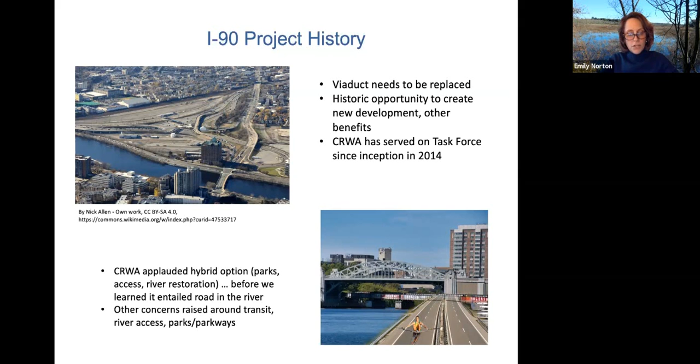And other groups had many other concerns, and Ari is going to cover many of those. So we are not holding this event just for fun or because we have run out of things to do trapped at home. We are doing this because this is your road. These are your parklands, your tax dollars at work, and your river. And you have the power to have an impact.

And in fact, arguably, you already have. MassDOT received approximately 1,600 comments on all aspects of the project, and of those, over 400 were saying that we don't want a road in the river. So we were very pleased to see MassDOT announce, literally just this past Monday—this is a screenshot of their live streamed meeting—that they're going back to the drawing board to look at alternatives that also do not entail putting a road in the river, as well as do more to take into account climate change, climate resilience, and environmental justice.

So what we're looking for tonight is to share with you our vision for what this $1 billion+ project should look like. We'd like to hear your thoughts, and then we encourage you to make your voice heard with your elected leaders because they work for you. And with that, I will turn it over to Pallavi.

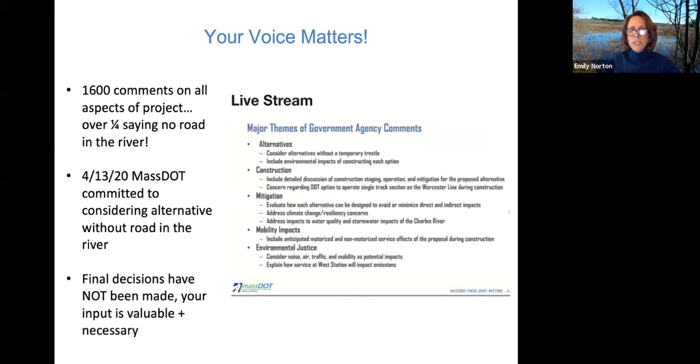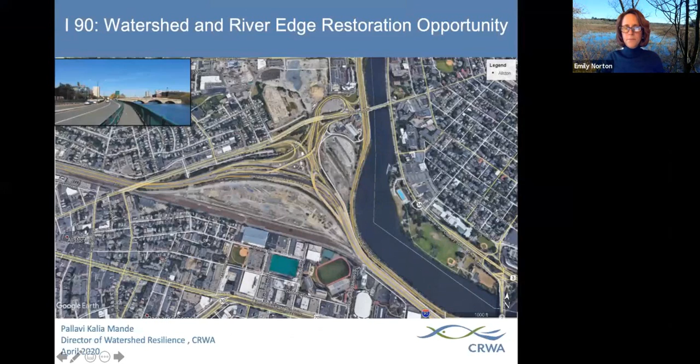Thanks for the great introduction, Emily. So I'm going to quickly give insight into where this project is situated for those of you who don't quite know the bearings. This is, as Emily mentioned, located in Allston. So I just wanted to orient everybody in terms of the location of the project. It's right in Allston, next to the river.

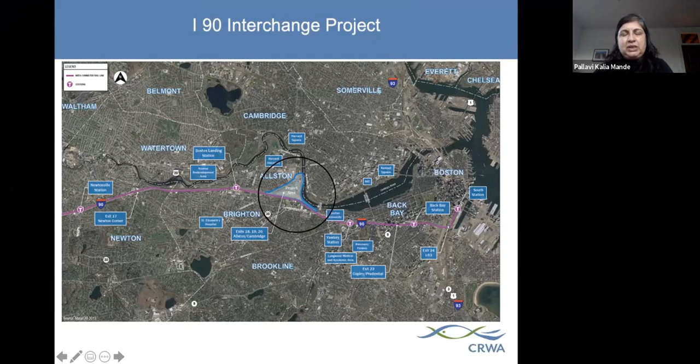The commuter rail section is what Ari is going to be focusing a little bit on, but my presentation is mostly focused on how the project fits into the broader stormwater management and flood resilience context.

This is what you see of the project right in what is famously called the throat area. As you can see, the cross-section here is very constrained. So a lot of the alternatives that have been formulated have been trying to figure out how you can fit the different modes from Storrow Drive, the Pike, the rail corridors, and the pedestrian and bike transit through this narrow section of right-of-way.

What I'm going to be talking mostly about is sharing with you the current DOT proposed layout for the project, including what they are proposing as temporary roadway in the river for the construction duration. We're going to examine the existing stormwater and flood inundation context for the project, and then look at how we see that as an opportunity for sub-watershed level restoration as well as riverbank restoration. And then I end with some discussion and next steps.

So as I mentioned, this is what has been proposed as the layout for the project. What you see highlighted in yellow is all the infrastructure that is at grade. What is highlighted in blue is what's coming on fill. And the section that's highlighted in brick red is what's on some bridge infrastructure. As you can see on the river edge, there's a new park that's being proposed.

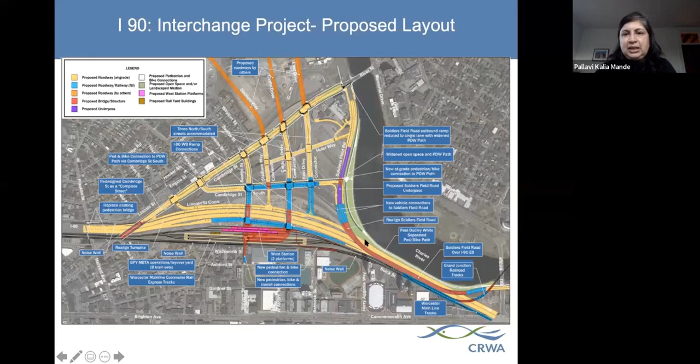And this is the section which is referred to as the throat area, which I'm going to zoom in on. As you can see, this particular option that has been identified as the hybrid option stacks Soldiers Field Road right on top of the eastbound section of the Pike. So it gets us some additional room to accommodate increased parkland and the Paul Dudley White pathway.

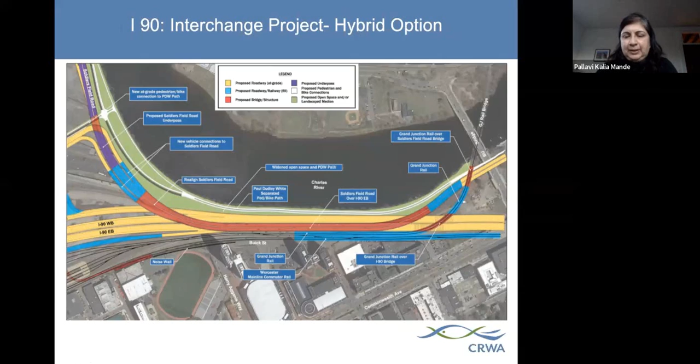This is what the proposed hybrid option looks like in cross-section. As you can see, again, there is Soldiers Field stacked right on top of the eastbound section of the Pike. This is the eastbound, and as you can see, we are able to accommodate the various modes of transportation, including the improved section of the Paul Dudley White pathway within the right-of-way. So this option, as Emily mentioned, we were pretty happy with because it was not impacting the river in any way, and we were able to accommodate all the users in terms of multimodal transit into the existing cross-section.

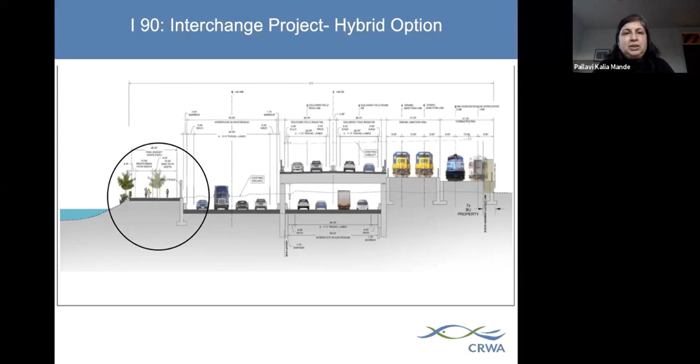However, once the discussion was focused on construction, we found out that there was, in fact, going to be a temporary roadway—relocation of Soldiers Field Road into the river.

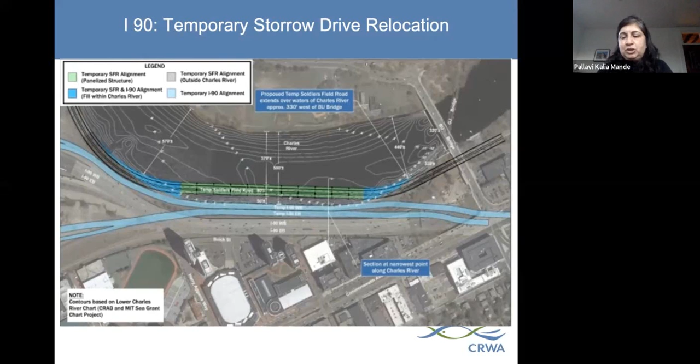There's a cross-section for about 80 feet that has been projected into the river about 50 feet from the existing riverbank, and that has huge consequences in terms of impacts to the river. Not only are we looking at possible sediment disruption from suspended silt, but also other contamination, whether heavy metals or toxic chemicals, into the water column.

We're seeing water quality degradation with increased erosion, fuel and oil spills, as well as excess nutrients and bacteria. And finally, there are obviously impacts to the aquatic habitat in the river. With rising temperatures, we see lowered oxygen levels, increased growth of invasive species, and decreased biodiversity, as well as algal bloom, which has consequences for human health too.

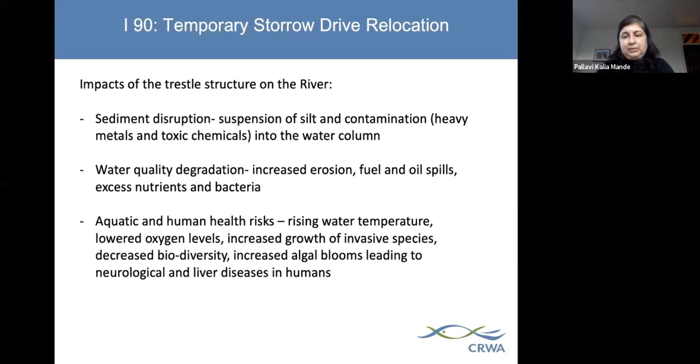So we've been up in arms about this proposal for the last 6 months. We've testified at various meetings of DOT and the FMCB board. And the good news, at least some of it, has been that we saw acknowledgement from DOT on what they've heard in terms of opposition to this proposal, and an actual commitment to seeing alternatives which would not have the temporary trestle structure in the river.

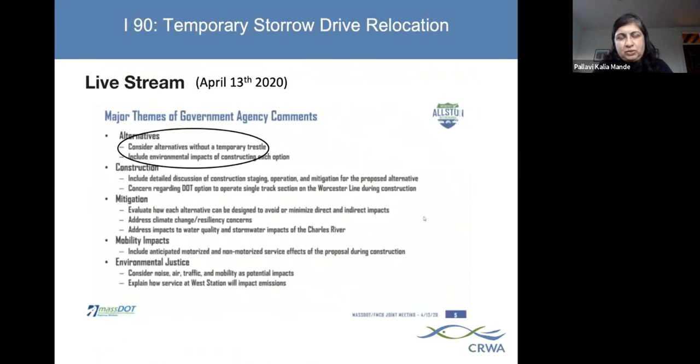This was a live stream presentation from earlier this week on Monday, and we seem to be making some headway on that, so that's good news.

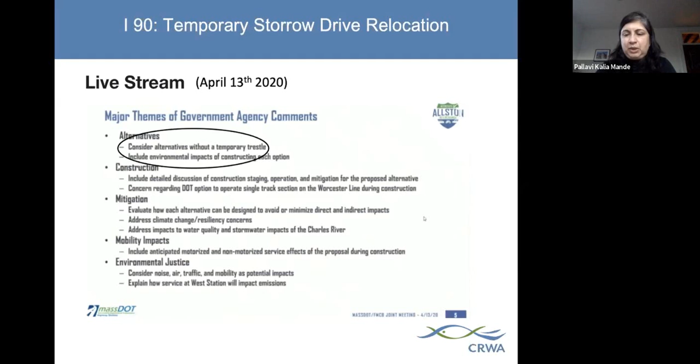What I wanted to share with you now is where the project sits in terms of its urban context. This is the area of North Allston Brighton, and as you can see in gray, there's a large section of impervious cover in this area, everything from roadway to parking lots to just paved areas.

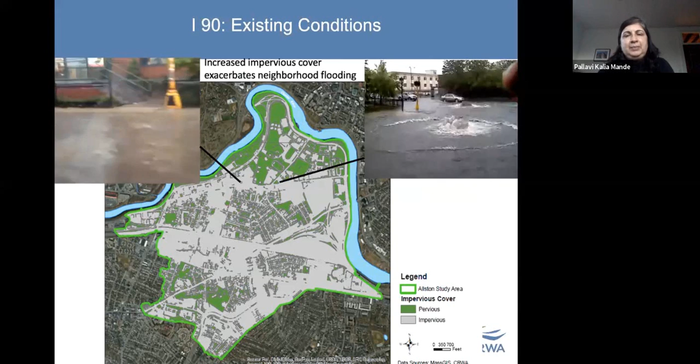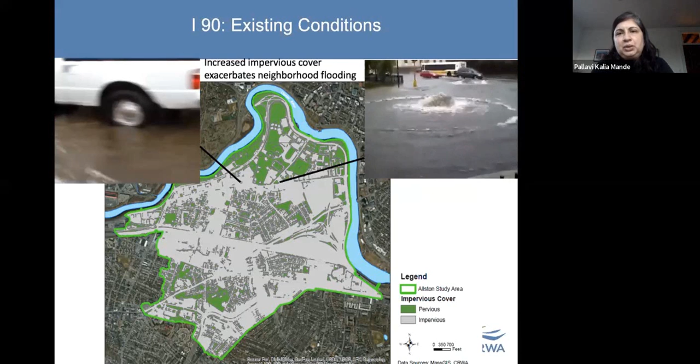And as a result of that, every time we have a big storm, there is a lot of flooding that this area has seen over time, and with climate change, that's only becoming worse. This has also resulted in instances of overflowing manholes and disruption to everyday life, with basements getting flooded. This area has seen, over the course of the last decade, a huge issue with flooding and stormwater management.

And these are all at capacity, so every time there is additional rainfall, there's nowhere for the water to go. So you see the flooding happening in your street right away.

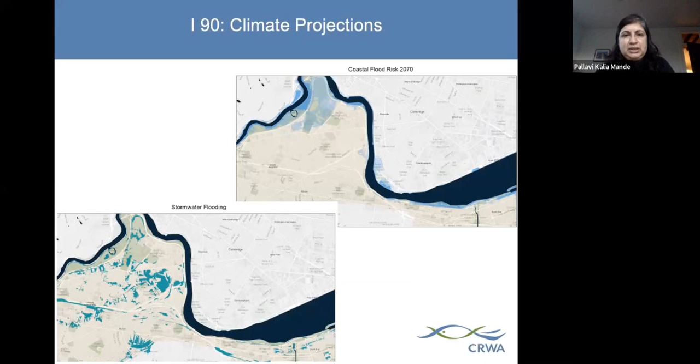With climate projections that have been modeled, we are seeing not only impacts with coastal flood risk, which takes into account the Charles River Dam still being in place, but as you can notice, the stormwater flooding is way more intense. When you combine the two, you can see that a large part of this area is going to be inundated by 2070 by water that could be around 10 feet.

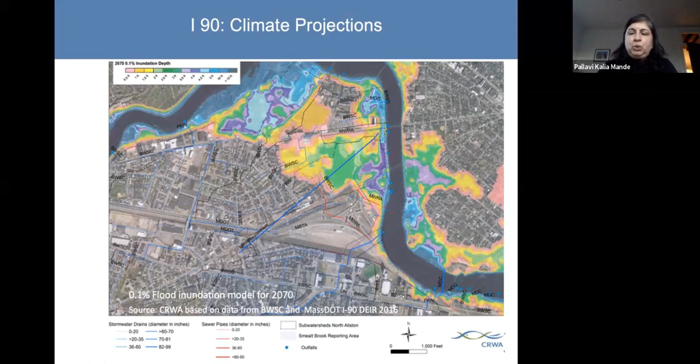So seeing these projections into the future, we are really looking for every chance we get to retrofit this project with what is known as green infrastructure. And I'll talk about how that could also be a positive for all the heat impacts that this area is seeing as part of the climate projections.

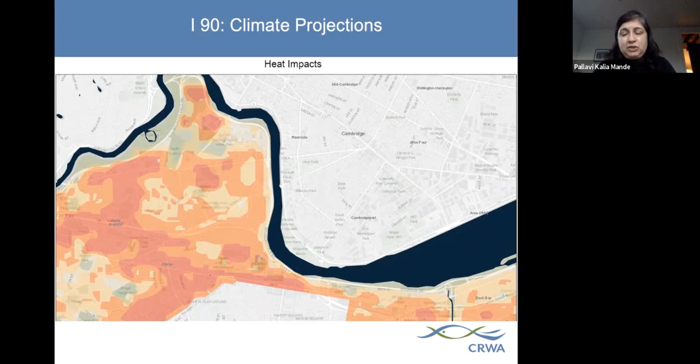So not only are we looking at, during wet weather, huge flood impacts, but during the summer months, the number of hot days above 95 degrees has gone up by many-fold in the last decade.

So where I mentioned green infrastructure, we are looking at soil and plant-based strategies to retrofit this impervious cover with strategies that would replicate the natural hydrology of an area. The idea is to replicate decreased runoff and increased infiltration, since converting a natural forested landscape to an urbanized one creates a huge difference in runoff and infiltration. So we are trying to retrofit these urban areas with green infrastructure to replicate those numbers.

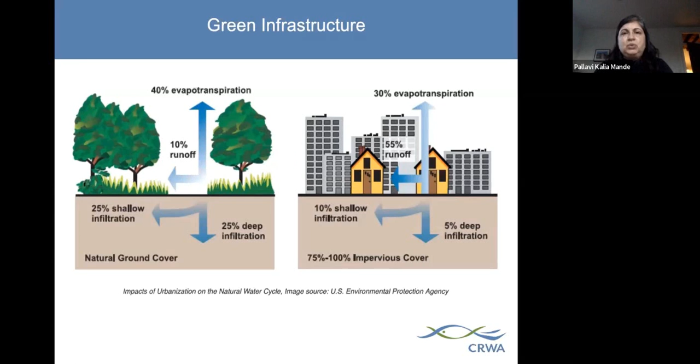As a result, we've sized different kinds of strategies in the different watersheds, such as bioswales, constructed wetlands, and inundated parkways, to be able to combat the urban heat island effect while also providing flooding storage capacity and water quality improvements.

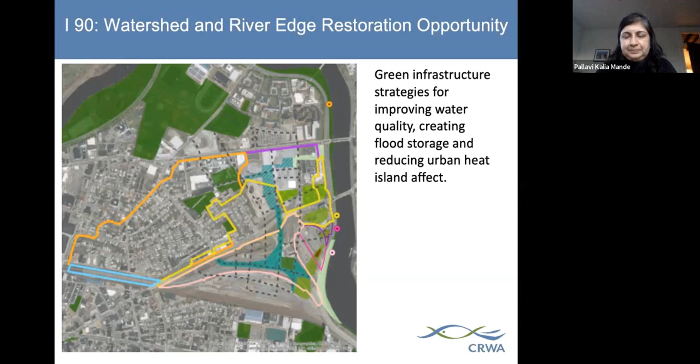These are pictures looking at the underground culverts that I mentioned to you. They're spewing polluted stormwater generated on roadways and paved areas into the river. We see this project as an opportunity to not only address erosion along the riverbank, but also implement strategies that would treat runoff coming through these pipe culvert areas into the river.

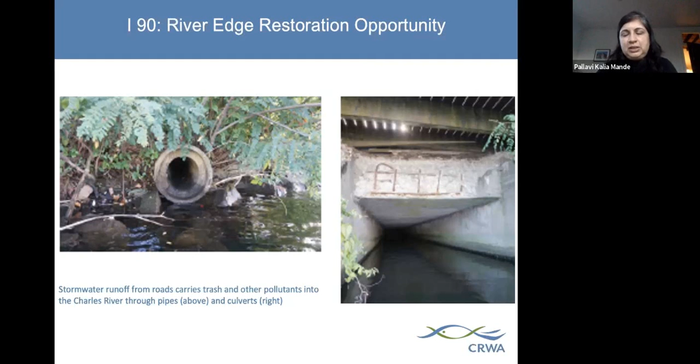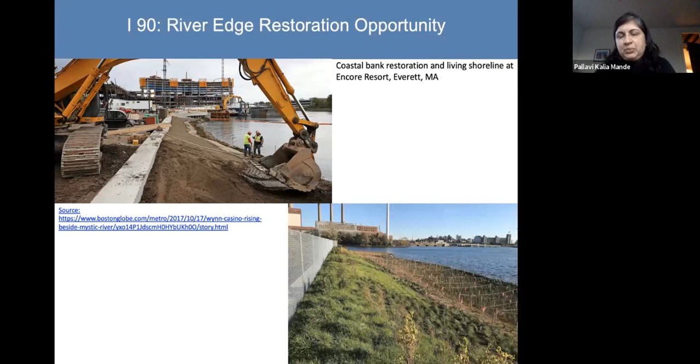These are examples of other cases where riverbank restoration has been done. This particular one is from Everett with the Wynn Casino, where they've installed a living shoreline as well as coastal bank restoration. It's been very successful in terms of both water quality improvements and bringing back a lot of local flora and fauna.

Again, some sections showing how the wetland has been restored, as well as the marsh that existed in this area, has been increased, given that this is still a tidal river. So there's a whole swath of salt marsh restoration that was undertaken at this project, which has been very successful.

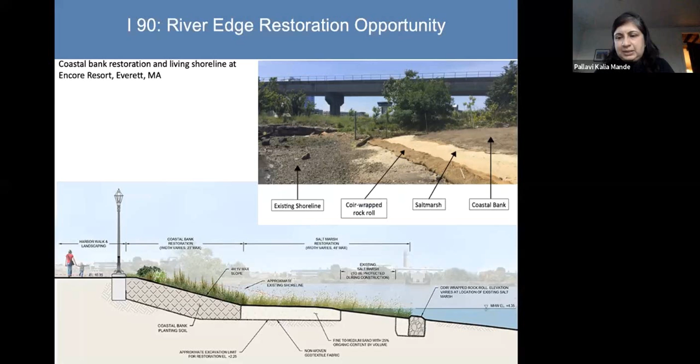Coming back to what we can expect to see in terms of next steps on the I-90 project, we are looking to hear about the scoping summary this summer. The project will go through a notice of project change as part of the MEPA process, also in summer 2020. The next couple of stages will involve submission of the DEIS to NEPA as well as the FEIS to NEPA. So both the MEPA and NEPA processes are running in tandem.

From our end, we see further coordination with the various stakeholders involved with this project, taking this to everybody who should be invested in this section of the river and the future it holds. We'll be reviewing Mass DOT's response to comments that Emily mentioned. There's been about 1,600 comments that DOT received, and they are currently in the process of responding to those, and they will issue those in the summer.

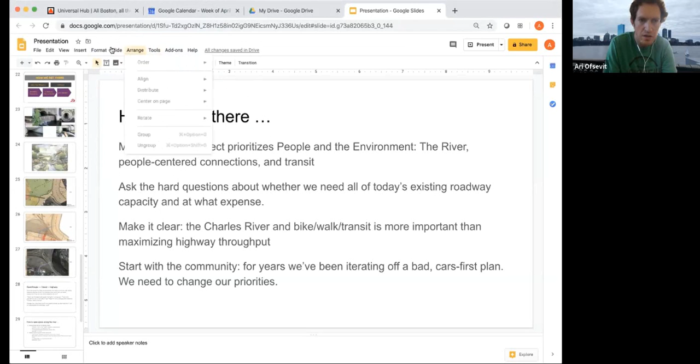All right, can people see the screen? Yes. All right, I can't see it. That's the only problem. Hold on a sec. Well, let's see. Okay, view. Just go to the top here. I gave the ending away there. Sorry about that. View, present. Okay.

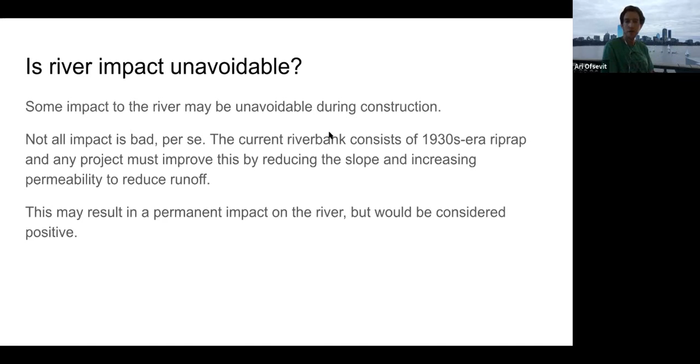The big question, I think, is what is the least impact we can have during the project and wind up with the best possible outcome in the long run? And can we balance all of the competing interests? Well, not actually competing interests, a lot of these dovetail with each other: green space, riverbank access, transit, reduce pollution, reduce traffic.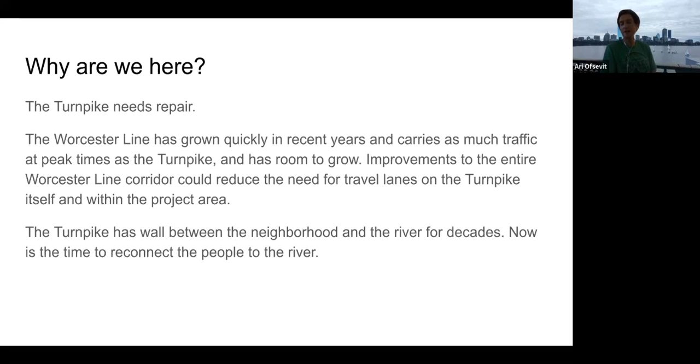And why we're here is the turnpike needs repair. The Worcester line, which runs along it, has continued to grow in recent years and actually has a lot of room to grow with strategic investments. It already carries at rush hour as many people by transit as by car along this river. And the turnpike, in addition to being right up along the river, is a wall between the river and the neighborhoods along it.

So where have we been? Taking a couple steps back, this is the sort of first concepts that were put forward by the project team, and I'm showing this just to show that we have made some progress. These were what they were calling their suburban style interchanges, which were going to take the current ramps and make them bigger and higher and make the viaduct wider, not really have any new buildable realm, not increase any parkland, and have a huge railway layover yard where they would just store trains in the middle of the day.

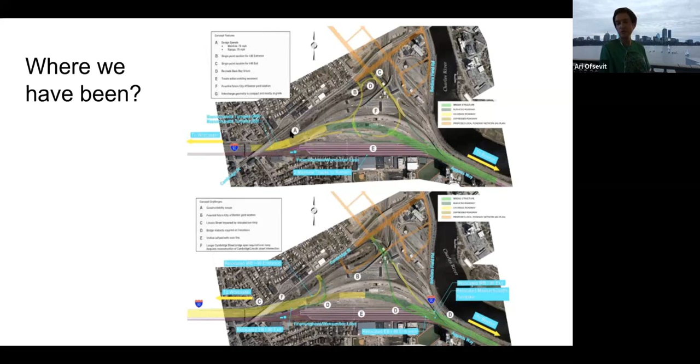The community and community groups have all said this is unacceptable, and we have made some success. So we've moved away from the expanded highway viaduct. We have moved to including West Station, which would be a hub where people would be able to transfer between trains and buses from the western corridor of the state going to Kendall Square, Harvard Square, and downtown Boston. We have seen some improvements to the river edge and some increased parkland, although obviously we want more. We've seen some improvements to what we call the street grid, so it can be more pedestrian friendly to get around in this area, not just a web of highway ramps that it is today, and that was originally proposed.

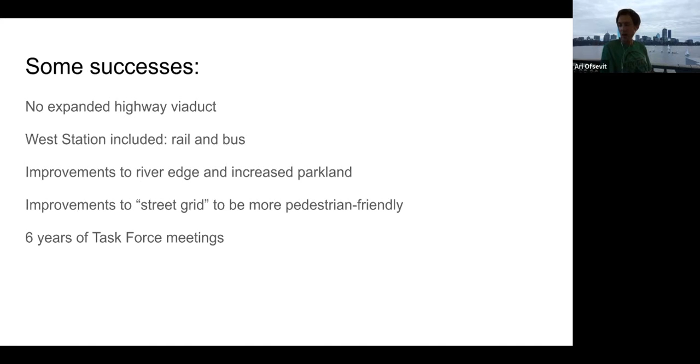And this has been going on through 6 years of task force meetings, and Pallavi has been at a lot of those, and there's been a lot of process, some of it good, some of it frustrating, but we have made some progress. Now, where are we trying to go?

I think we need to start having some pretty frank discussions about how much actual need we have for all the highway lanes that are being put forward. It's sort of an if you build it, they will come idea. West Station, it's good that it's now included in the project, but we need it to be built early so that it can be used during the project and doesn't hamper transit when we have highway reductions as well.

We need it to be functional so that people can use it to get where they want to go, that it has high frequency, that people can get to West Station, to go to Harvard Square, to go to Kendall Square so they don't have to drive. And we need to have capacity to move people back and forth into this area. We need to increase bicycle and pedestrian facilities and river edge facilities. And this really needs to be a transit first approach to incentivize non-car travel.

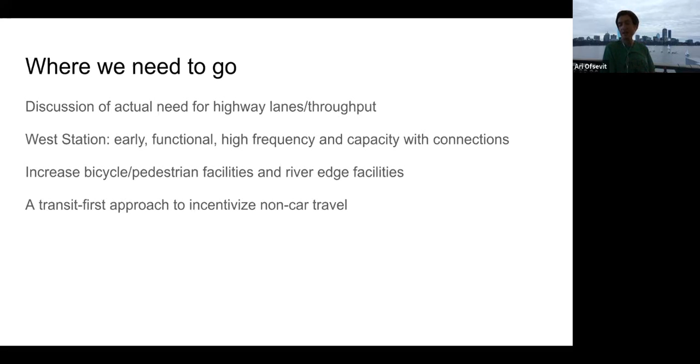The area is owned by Harvard University, and it is planned to have a lot of development. And we can either build it in a way that really is forward-thinking 21st century, gets people where they need to go with the least impact possible, or we can build another seaport.

The hybrid concept, as discussed, was the state moving away from a wide viaduct option to have less impact on the river. So that was good, and it was originally promising. But with this entirety of Soldiers Field Road and the river impacted for up to a decade is unacceptable.

Basically, we started out with a pig, as I showed earlier. We put a lot of lipstick on it. The hybrid was a way of putting even more lipstick on a pig, but it wound up still being a pig with lipstick on it.

We need to talk about the demand. The turnpike was overbuilt for when it was built, and it's probably overbuilt for current traffic. There's actually some good data coming up on this, and we should continue discussing it.

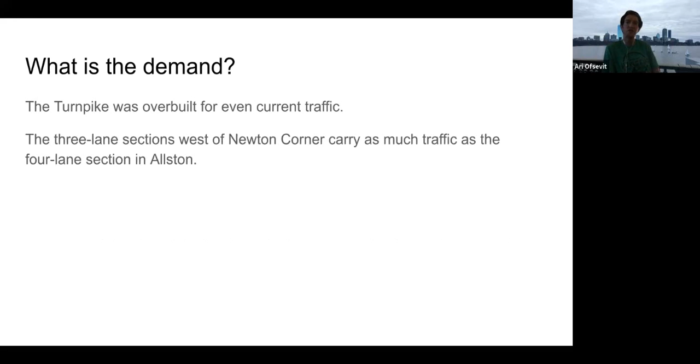The 3-lane sections, this is almost my personal opinion having looked at this data recently, but this is where we are: the 3-lane sections west of Newton Corner actually carry as much traffic as the 4-lane section in Allston does. So should we double down like in the 1950s, where we want more cars, more pavement, and more pollution, or should we build a roadway which pushes more cars through, which only then go into downtown Boston and Cambridge, which are also congested urban roadways?

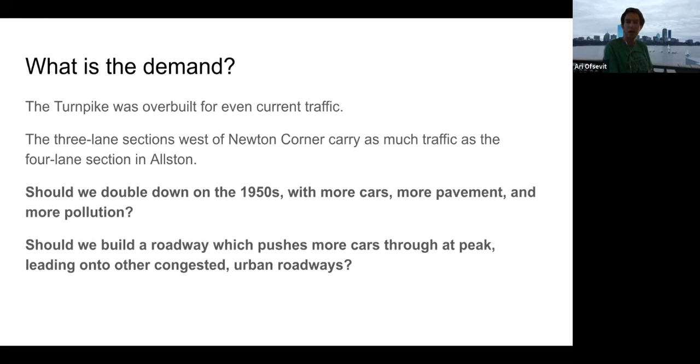This chart here may be a little tough to show, but what it does show, in sort of the green-beige color, is the number of cars coming through the toll gantries at peak hour. This is daily data, so this is an average weekday.

In the morning, there's 5,000 to 6,000 cars going eastbound. In the afternoon, there's only about 5,000 cars going westbound. If you look at the yellow and the purple, which are bus passengers and commuter rail passengers, there are actually as many people on transit in the morning and evening as there are in cars.

But what I really want to show here is that if you look at the different portions of the turnpike, there are really only 5,000 cars at any given time on it, at least on the westbound section, whether it has 4 lanes as it does in Allston, or 3 lanes as it does all the way out to Framingham, where volumes begin to drop off.

So when we see a lot of traffic on the roadway, it's not necessarily because there's not enough lanes, but because there are bottlenecks, because there is that demand, and because we don't have good enough transit.

Now, if we build a wider highway, we will probably still have that traffic. But if we right-size the highway, if we size it for the amount of traffic we currently have and encourage less traffic, then we can try to improve that.

The other piece is that the commuter rail right now runs 4 trains per hour and carries as many people as the turnpike does. The commuter rail, the way we operate it, really can only run 4, maybe it could add a few trains per hour.

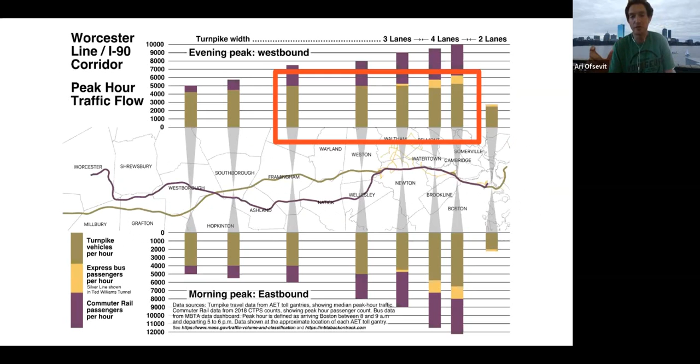But if we move to what we call a regional rail plan, which I'll get to in a second, the commuter rail could carry probably twice or even 3 times as many people as it does today. And the 2 tracks of commuter rail could carry significantly more than the 8 lanes of highway.

The other piece is the Kendall connection, which has become an important destination. With the cancellation of the 1970s-era Inner Belt Highway, which would have put more bridges and more highway interchanges—I'm glad we don't have that.

It has grown because of transit access, not highway access. There's no highway to Kendall, and there's no good way to get there from the west. To get there from the west by transit requires going all the way into South Station, transferring onto the Red Line, going through downtown, and winding up at Kendall Square. But it's only about a mile from where we are at West Station, where we're talking about here.

So most people drive, not because the traffic is fun to drive in, but because there's no good alternative. So we can either build more pavement in Allston, more impermeable ground, more traffic, or we can build a good transit connection.

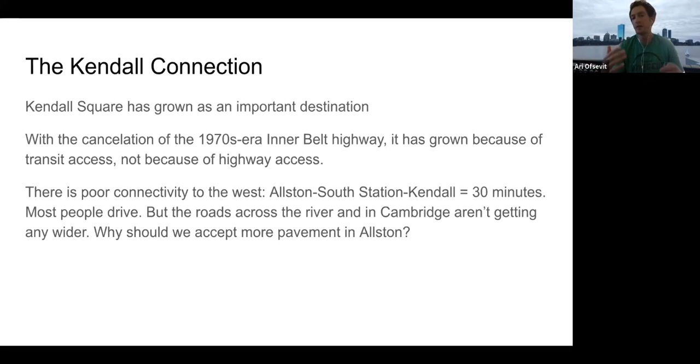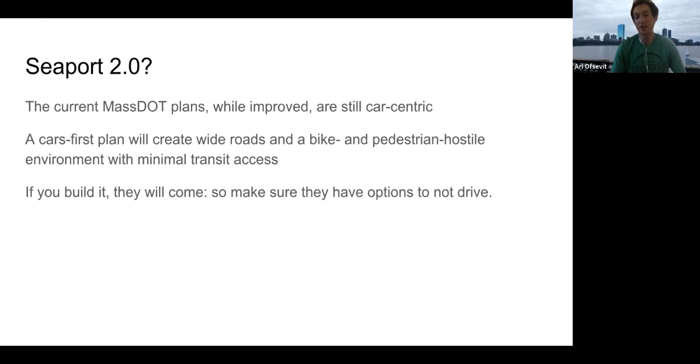As I said before, we don't want to build a Seaport 2.0. We don't want MassDOT's plans, which have improved somewhat but are still car-centric. A cars-first approach means roads that are hostile to pedestrians, and even if you have good transit, it's harder to get to. If you build it, they will come, so make sure you build transit and not as many roads as possible. These are some quick slides from Transit Matters about regional rail.

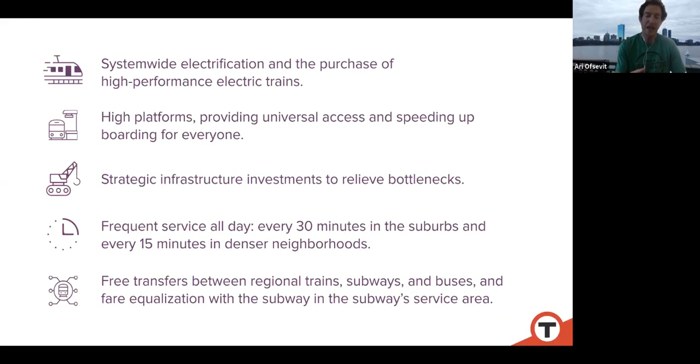This would be in the long run. You would have frequent service every 15 minutes on a line like the Worcester line, more frequently at rush hour, with electrification and high-level platforms. The trains would behave like a subway and would have the capacity of a subway.

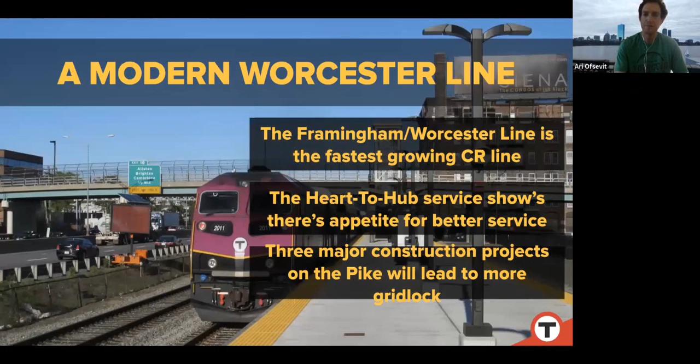The Worcester line has shown that there's obviously interest. So how we look to get there is adding frequency during mitigation and improving bottlenecks on the train line, which there are, and really improving the train line so that more people can get there. That may even mean adding parking, adding feeder service, adding bike and pedestrian access further west so that people don't have to drive.

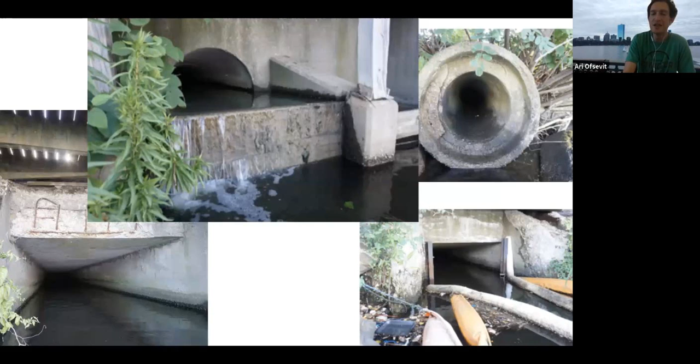Pallavi showed these earlier. These are some of the waterways currently coming into the river, and these are not really what we'd like to see. Some of these are more than a century old.

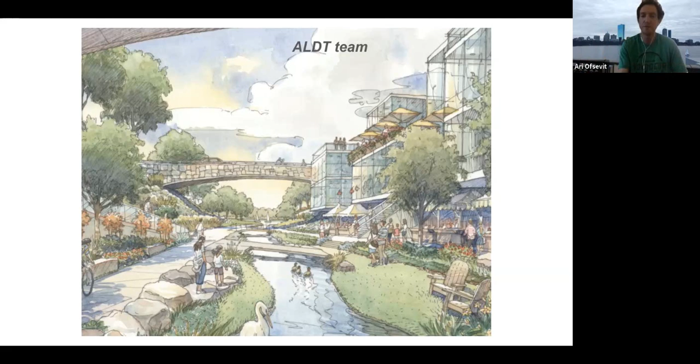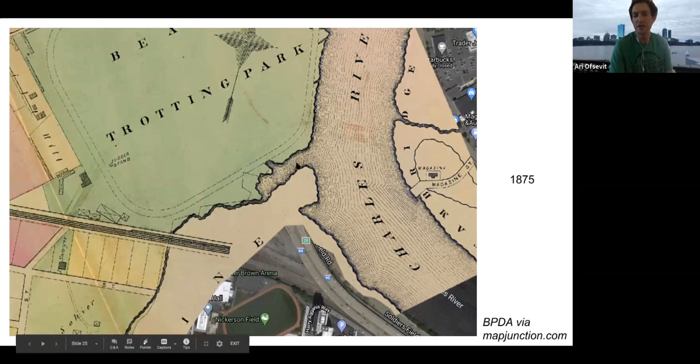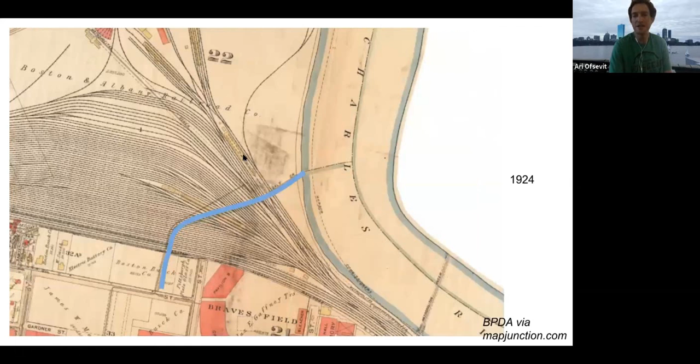50 years later, it had been built over with a rail yard. It shows up as a culvert on this map, and I put it in as a blue line—that'll come up in a moment. You can see Braves Field, when the Boston Braves were still in town. This is currently where the rail yard is, and if we go to current, this is what we have today: we have the highway, we have the railroad, and we still have Salt Creek there.

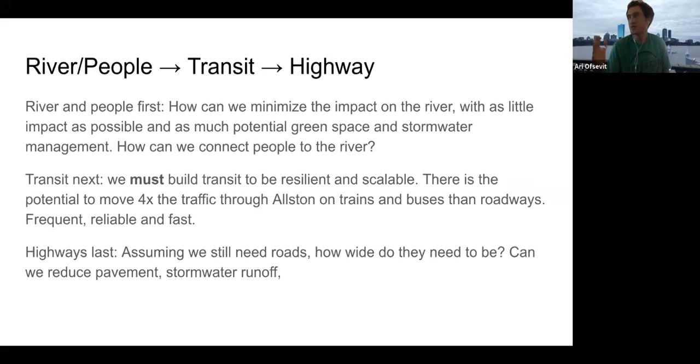What I want to talk about is how do we put river and people first? How do we minimize the impact on the river, and how do we connect people to it? Then, how do we build transit that must be resilient and scalable, with the ability to move more people through on trains and buses than on cars, which doesn't take a lot of room because transit is that much more efficient at moving people? And assuming we still need roads, which there probably will be some need for, how wide do they need to be, and what configuration? Instead of running a model and saying how much road do we need, run a model saying how little road can we get away with.

The idea then is, can we save space along the river? If we don't need all 8 highway lanes, we can actually save 11 to 12 feet per lane—that means not pushing elements into or towards the river. It might be possible to do that, but we really need to look at how. This is going to be 10 years with 3 lanes of traffic on the turnpike. If we can get away with that for 10 years, maybe we can get away with it forever.

And then reducing the impact of other elements. The Grand Junction rail tracks at some point have to cross over the turnpike. If it's above grade, it requires an expensive, high-impact viaduct. My original concept that got me involved with this about 6 years ago was a rail viaduct to pull out of the river. We've since moved to sort of a hybrid, more towards a viaduct for Soldiers Field Road, which is a little less intrusive, but still quite a lot of concrete and a lot of construction issues.

Two fewer tracks is 30 to 32 feet of width. Combined with 2 fewer lanes, that would be 50 to 60 feet that we wouldn't be building into the river.

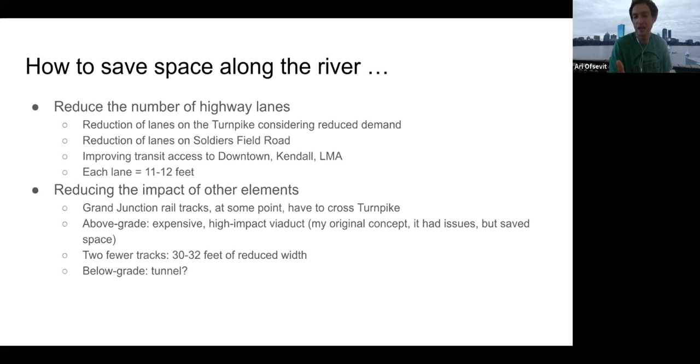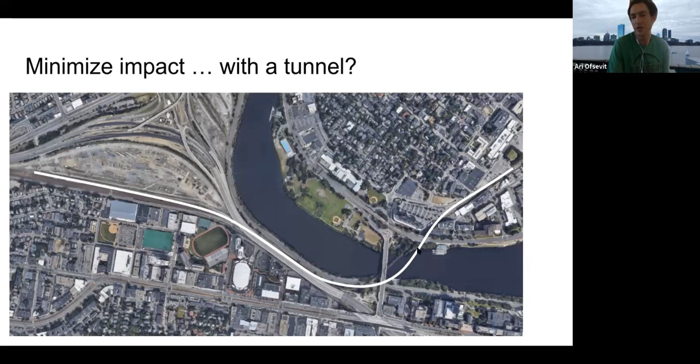There's been some discussion recently, never talked about before, of whether that could actually be done in a tunnel, where the Grand Junction would go under the turnpike and then under the river. This has been discussed by some project areas. This white area would show the length of that tunnel, most of which would be either in the rail yard or in the project area to get the Grand Junction to Cambridge, and would be built as part of the project. It would have to cross the river on a relatively short span, there would be impact there, but that would be temporary impact and it wouldn't require probably going to the river.

If you overlay on top of that, that would then allow - and these are the paths we'd really like to see in any iteration - these are the elements we're looking at.

Coming in from the east, you'd have the Grand Junction Bridge and the path along the river, but also what we call an Agganis connector. So from Agganis Arena to the river, the Salt Creek issue would be getting the rail over or under Salt Creek. That continues to be an issue.

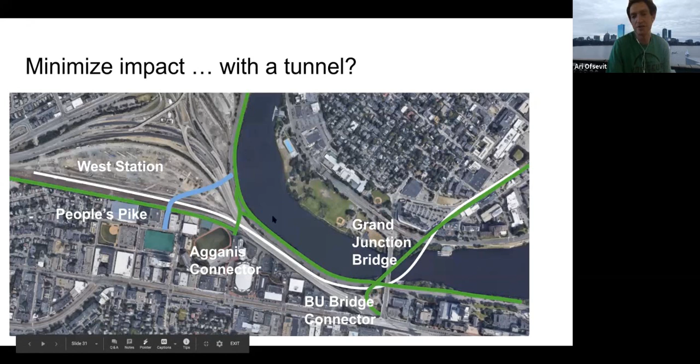And then this is the People's Pike that would run west near West Station and then run out towards Allston. That would allow people from Brookline to easily access the river, from Allston to access the river without crossing all the roadways, from the BU Bridge to access Cambridge without crossing the BU Bridge, and really improve access along the river. So how do we get there?

I think we've talked about this as well, but we need to make sure that we prioritize people and the environment, ask the hard questions about how much road capacity we really need, and make it clear that the Charles River and bicycling, walking, and pedestrian transit access is as important or more important than maximizing highway throughput. What we've really done for the last several years is started with the highway and then fit the community around it. I think we need to start with the community and then fit the highway around it.